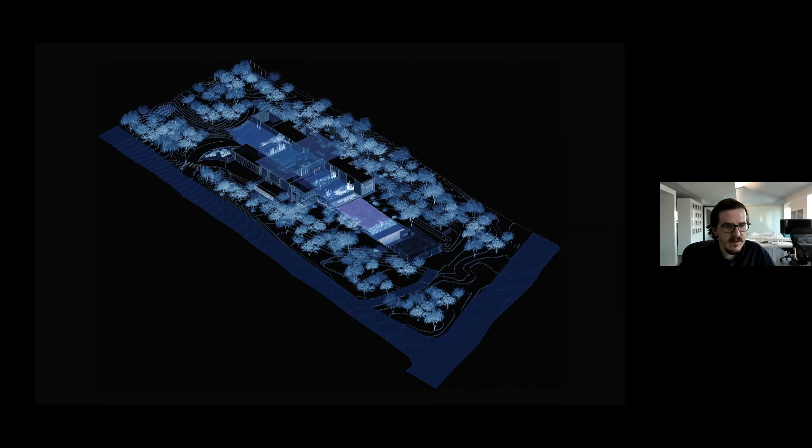So it's not just the Ghost Wash. The name, I guess, comes from this idea that it's a remnant, or the vision of an idealized wash that is in that area, which has now become part of the house.

So the conceptual framework begins from these desert images. The top image shows a nurse tree, which provides shade, adds moisture and cover to animals that graze, and adds extra nitrogen from leaf litter and bird droppings from the branches. These conditions facilitate the growth of cactus below the overall canopy. The desert wash at the bottom captures water, soils, and organic matter from the surrounding landscape. It hosts bigger trees than the surrounding desert can support because it has access to more water. Dry washes occupy less than 5% of the lower Colorado River subdivision of the Sonoran Desert, but host 90% of the bird life—so they're important corridors for animal and plant movement, and for the environment within the Sonoran Desert landscape.

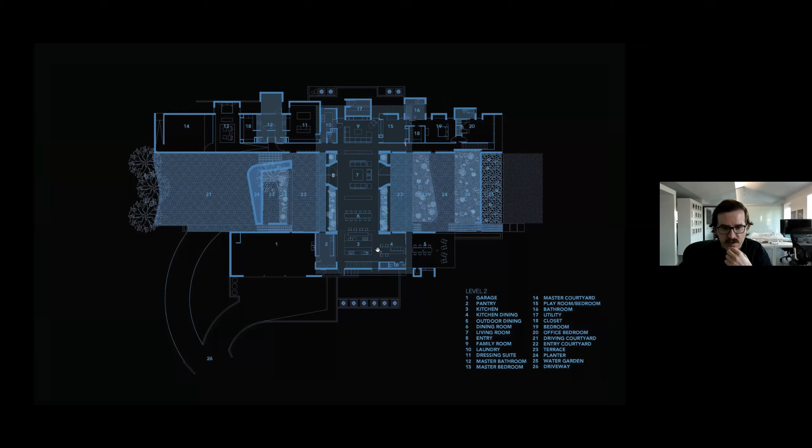Looking at a basic floor plan of the upper level, you can see the programs: the driving courtyard, entry courtyard terrace, entry doors, and the main public spaces of the house. On the west side you have a master suite area, master closet, a living sitting area, bedrooms, an office space, garages, kitchen, and patio. The lower level has more office space, a gym, wine cellar, and mechanical areas underneath.

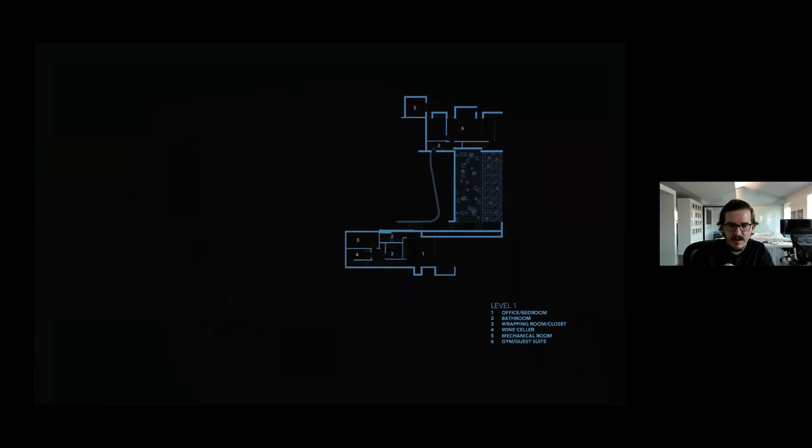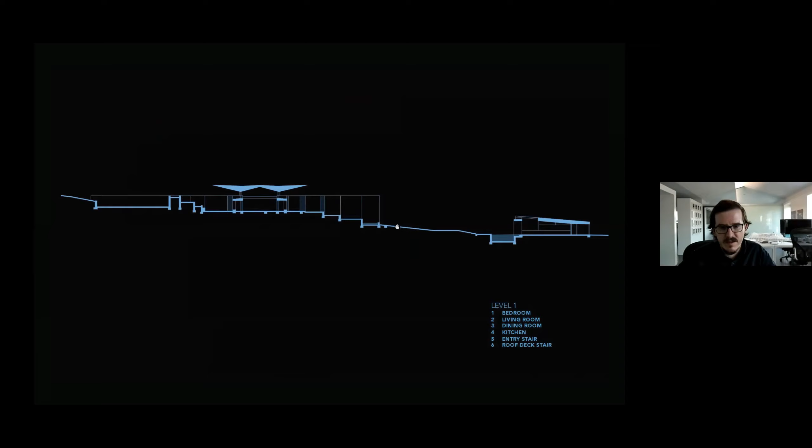Through the section of the building, the parking court is over here, then the entry courtyard with the planters, the public space in the middle underneath the canopy, and how it steps down the landscape to the pool area, with the pool house above.

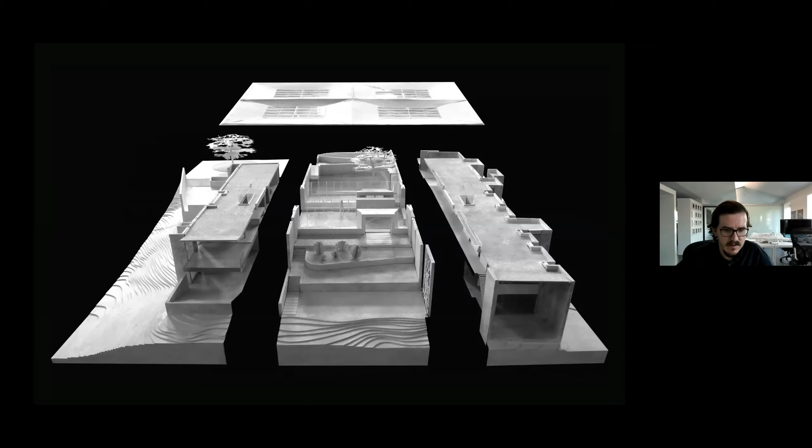This was an early model we made of the project almost 10 years ago, to get a better understanding of the systems involved, and to show the early thinking on the project.

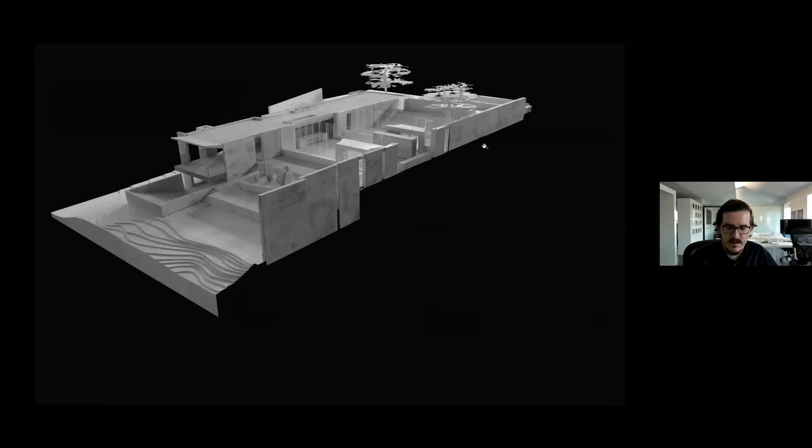Going through the three bars of the project, you can see the patio area, space underneath, kitchen, and the garage area. That middle banded landscape coming through is more figured with curved walls and concrete apertures. The west bar has deep recessed windows, a much more massive part of the building, as a way to shield the rest of the building from the low west sun.

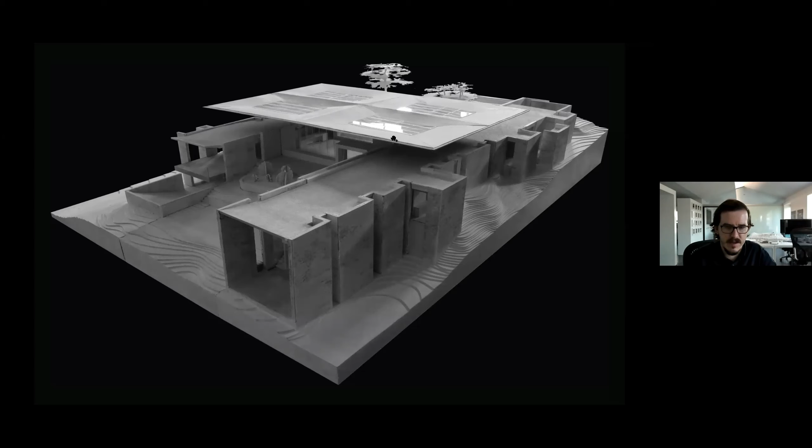Then the canopy comes in over the top. It not only shades the building but has solar arrays on it—the configuration is slightly different than what's shown here. It also comes down into four points that land on four parts of the concrete ribbons that form the entry, as a way to collect rainwater from the building.

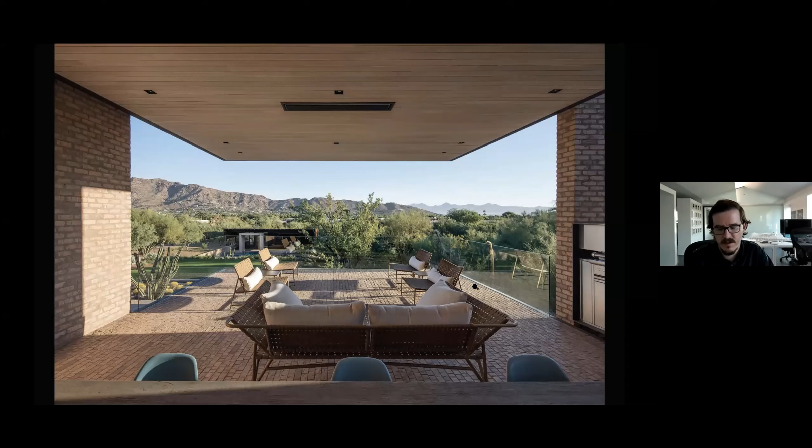If you're looking back up at that patio, you see the landscaping integrated as part of this highly defined wash, architectural wash space in the middle.

There are two separate offices in the house. One is on the west bar, one is up on the upper level, the east bar.

So this house won the AIA National Residential Award in 2018, as one of the top - I think there were 5 or 6 houses that the AIA selected in their residential category.

So now I'm going to talk about two projects that we haven't really talked about too much yet: the 4321 house and the OB1 house. One is located in the Arcadia neighborhood of Phoenix, and the other is in an area of Scottsdale, basically the middle part of Scottsdale.

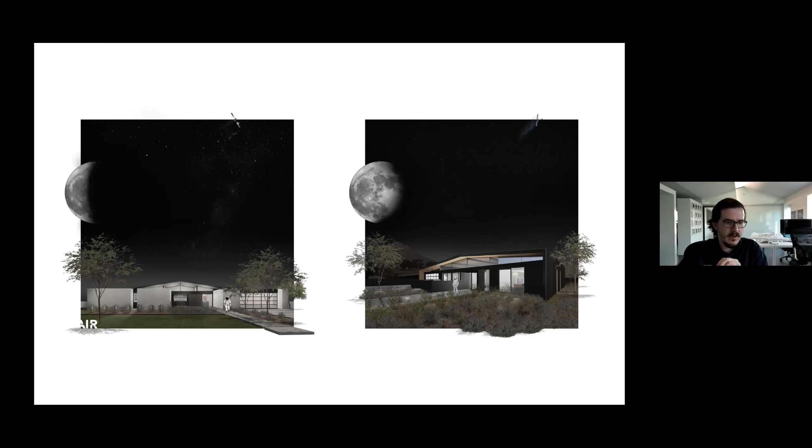So this is the finished 4321 house. Looking from the outside, you can see those white stucco masses.

This is unfortunately a west elevation, so it's some difficult sun exposure in the evenings. I'll show more of the tectonic system that's supporting this, but it's based on what we looked at in some of the case study houses, the Eichler houses, where they had large glulam beams that transferred the loads of the roof across the building.

So with this, we looked at how do we not only create a thin canopy that disperses the weight across the space, but transfers those loads down to larger glulam beams that form a datum across the house, and span across these masses to support the weight of a roof that on the outside seems very thin, but you can see the thickness of the glulams it takes to support that weight. So it's about these larger masses in front that protect the building as much as possible from the western sun, these recessed spaces, and then the large canopy on top that disperses its weight down to those masses.

And the glass acts as a negotiator between those systems and fills in those gaps to create a sealed system that's obviously occupiable, but also as a way to bring light in and to negotiate the geometries that are different between the massing and the canopy. So beginning in the construction of it, you see how the massing of the building, these low rooms are on the side, and then the canopy itself marches up over the top.

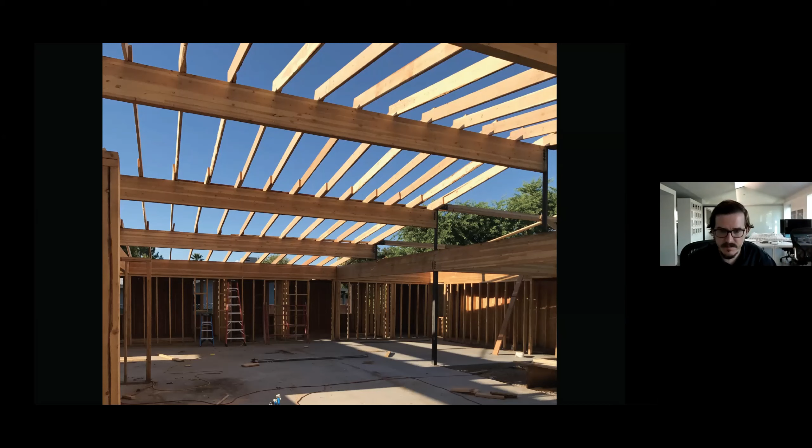And here you see during construction, the sheathing on the massing parts of the building, the steel supports, and how the roof is carrying and floating over the top. And this would end up becoming the front door right here. See in the kitchen behind it.

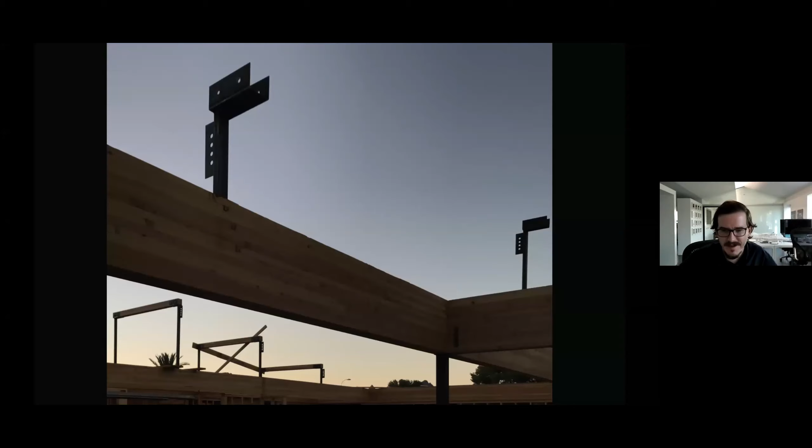Again, another view of those steel supports. You can see they haven't been quite calibrated yet, so they're not tuned to be plumb. But how those things sit on top of these transfer beams in the middle span, and then divert the loads down from the smaller beams up top that they're carrying.

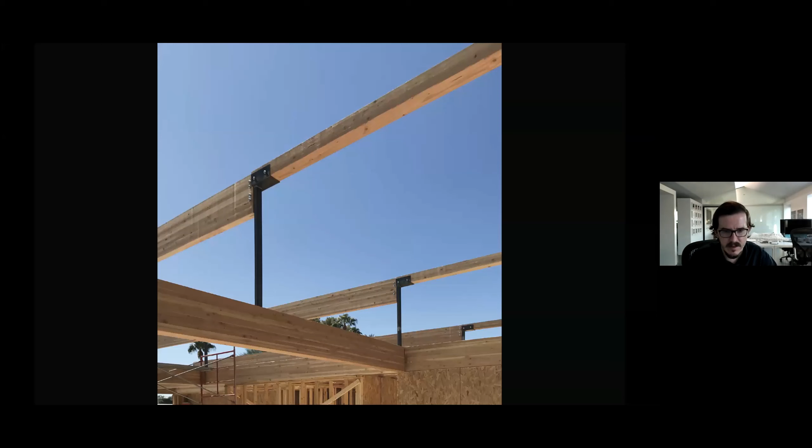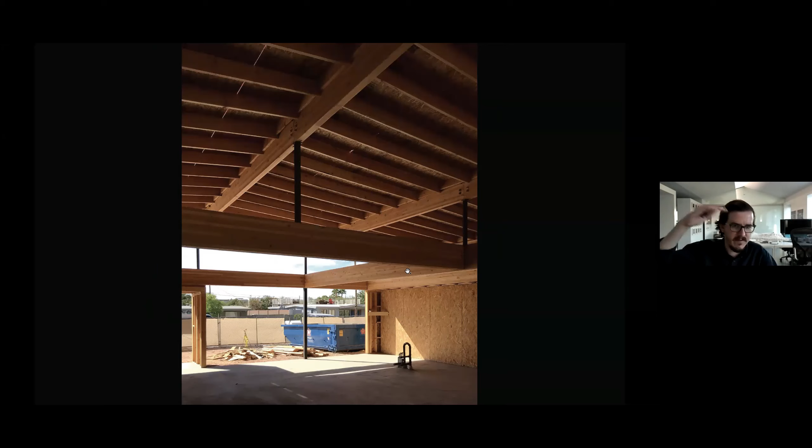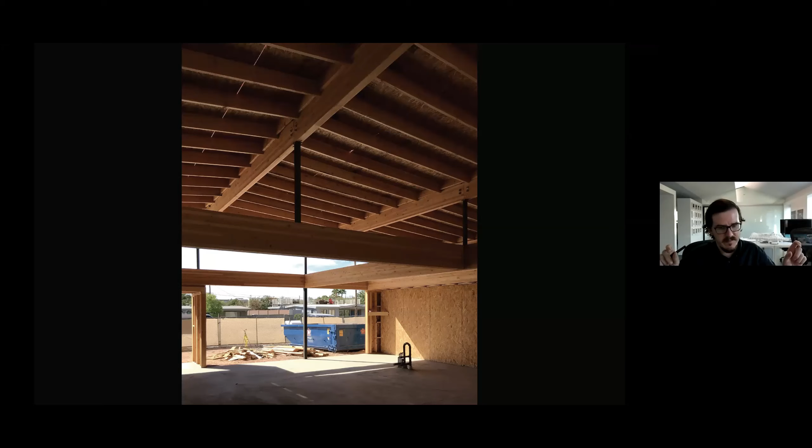The framing comes into the side, steel post, 4-inch by 4-inch steel post supporting the roof, and then going down to transfer beams below. So you get the benefit of the height, but the mass of the structure is dispersed over the whole dimension of the canopy, so you're not trying to beef up something at the very top or at the very bottom - it's spreading the structural loads across the building.

So this is the house with the wood ceiling framed in. You can see up here, there's some reflectivity - it may be hard to tell, but you can see in other photos we had some mechanical areas above this datum height of the glulam beams, so we clad those in mirrors. It reflects the tongue and groove boards over the top and allows that continuity of material to read across the space, so you're not distracted by other masses popping up outside the building.

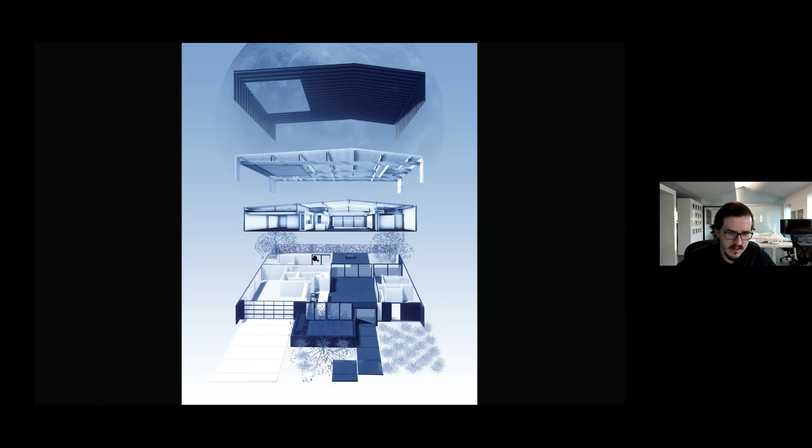So basically with this, you have the front entry here, the living dining area, kitchen, pantry, powder room area over here, a bedroom, a Jack and Jill bathroom behind here, and then another office/potential bedroom right here. Then the master suite is back here with the master bath right here, and then a garage tandem spot that could eventually turn into another bedroom.

So quickly, I'll try to wrap up.

We're still determining the nomenclature for this project, but this is what I'm going to show you: the Cape Town projects, or at least one of the projects we're doing in Cape Town that we tentatively titled Gemini. In the case of this area, it's a single-family neighborhood trying to densify, so our client tasked us with creating duplexes—in that sense we have these twins within the building unit itself. But also we're doing two projects relatively close to one another, same program, same client, same building systems, but radically different in terms of their form. So they're twins in that sense also. That's where the kind of thinking comes through with that.

But to familiarize yourself with the geography of the Cape of Good Hope in Cape Town, you have the main city center right here on the north side of the Cape. Table Mountain, which you'll see pictures of, is right here—it's a very iconic, emblematic image of the city. You have these vast areas of flatland that contain mostly the townships and lower income levels, and then some scattered cities across the Cape as it extends down to the Cape of Good Hope.

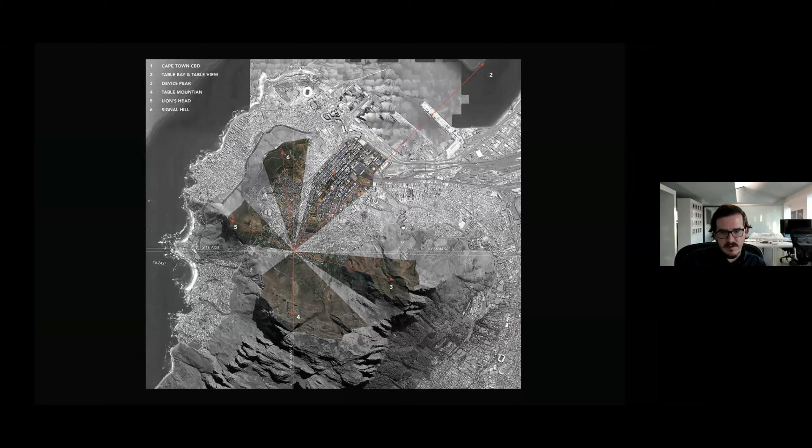But basically, our projects are located right at the base of the natural preserve for Table Mountain. So all this area up here is basically nature preserve—sometimes forest fires or brush fires go through there.

They try to limit the spread of those from the natural areas into the city, but it's a constantly regenerating landscape. It's got unique flora and fauna, and the Cape itself has its own class or category of flora that are only found there and nowhere else in the entire world. Even Table Mountain has endemic plant species that only grow on Table Mountain.

So it's a very unique natural landscape, and we tried to look at some of that as we were designing projects. During most days in Cape Town, it might start out fairly clear, but then over the course of the day, you get an accumulation of clouds that come in over the top of Table Mountain, over Devil's Peak, and they call it, not ironically, the tablecloth that comes over the top. So the way the cloud systems function...

...and are part of this constantly evolving landscape was something we looked at in thinking and design of our precast concrete systems for the project. Looking at the geology, looking at the natural landscapes, and how we could design a system that could integrate views and relationship to the site, the same way the clouds do, but then be structurally enough to span and create open and viable spaces below, while also accommodating things like solar panels on top, or collecting rainwater for rainwater harvesting purposes.

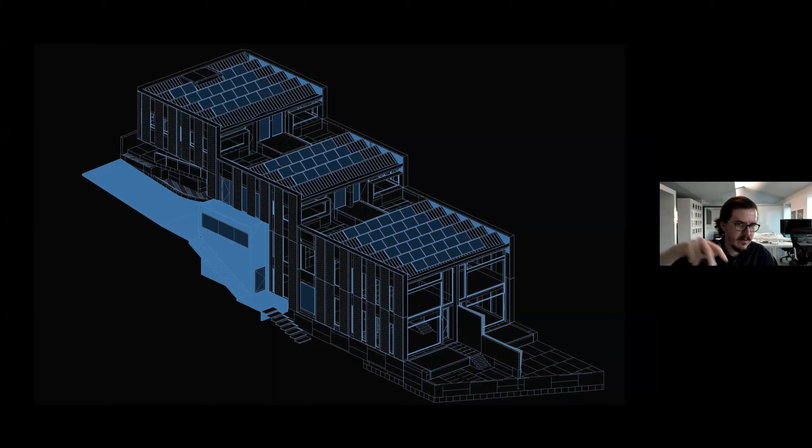But the constraints of building down the side of Table Mountain created this condition where we have 3 separate volumes right here. By zoning, we were required to step down in accordance with the heights dictated by the city. With this, to mention too, these are 2 units, as a duplex. We saw a lot of cases in Cape Town where you'd have 1 unit on top and 1 unit below, but in order to prioritize the views, we wanted to have 2 units side by side with equivalent views, primarily out towards Table Mountain and then towards the city center and Table Bay.

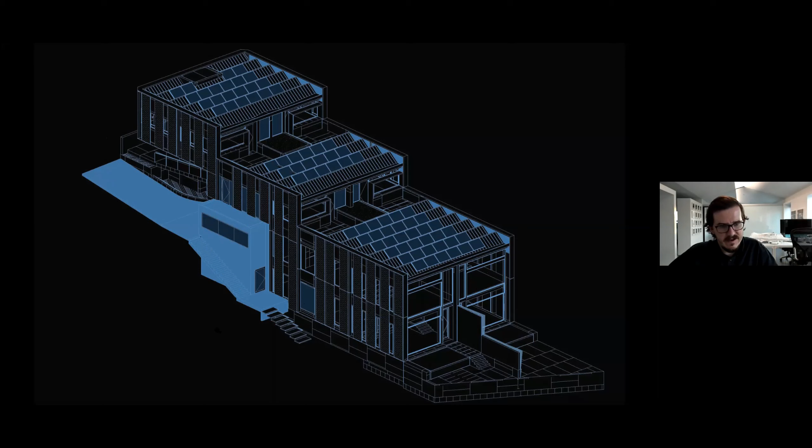So these are 2 units side by side with the same program. A master bedroom area up here, the entry is kind of below this, you'll see in the section. Entry area with a bedroom on this level, garage underneath. The driveway comes down, and then you enter the garage down here, and then kitchen living area on this level, and then a recreation area, bedrooms, and service area down below. So it's a lot of program tightly stacked and condensed in a narrow band, then fit side by side to form 2 units.

So you can see here the way it steps down. We have a cistern down at the bottom of the swimming pool here, but the main entry would be at this level. You walk across up to get above the garage area, and then enter into the building here, then descend down a series of stairs. You can't see it in this section, but behind the garage here, you would descend down a stair to get to the main living area. Or if you're coming in for daily groceries, things like that, you pull into the garage and then just walk right through the kitchen.

But you have the master area up here, bedroom, closet, bathroom. The bathroom has views up towards Table Mountain, and then also a patio up here with views out to the city center. You can see the beams as they march down. Clerestory windows also up here, so you get views from inside through the building up towards Table Mountain.

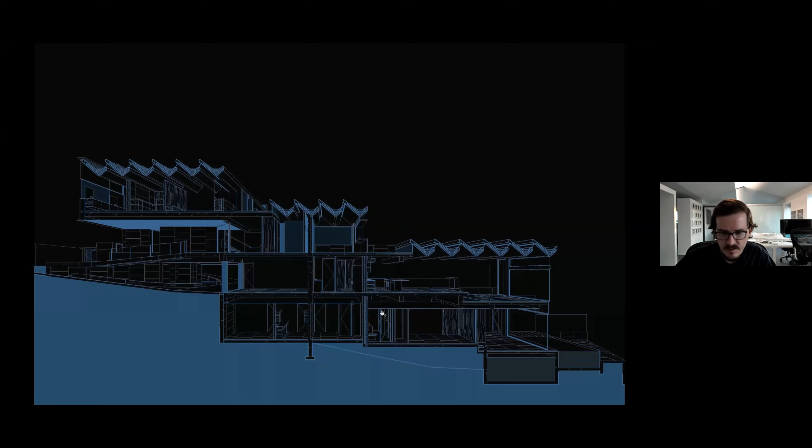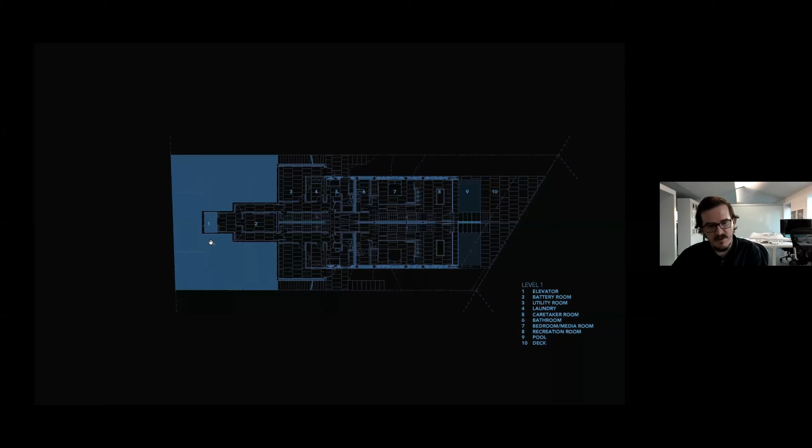So at the bottom area, we've just shown one side of the project. The program is mirrored on both sides, but we have an outdoor patio, swimming pool, recreation area, bedroom, bathroom, servants' or caretaker room, laundry, and then a mechanical area, and an opportunity for an elevator here, which acts as the main structural support for the master bedroom area up above.

Again, you see the driveways coming down into the garages, entry, pantry, kitchen, dining, and then the living area, which has expansive glass that looks out towards the city and Table Bay.

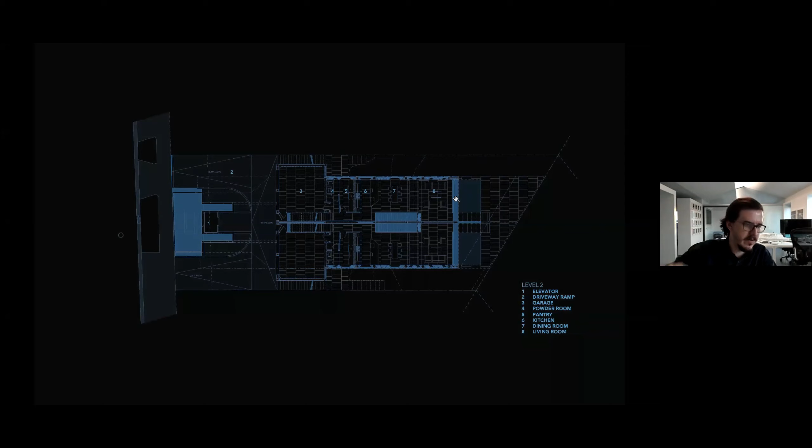This is all with north to the right, by the way. So this is the entry level up above, up a ramp to the main door of the house.

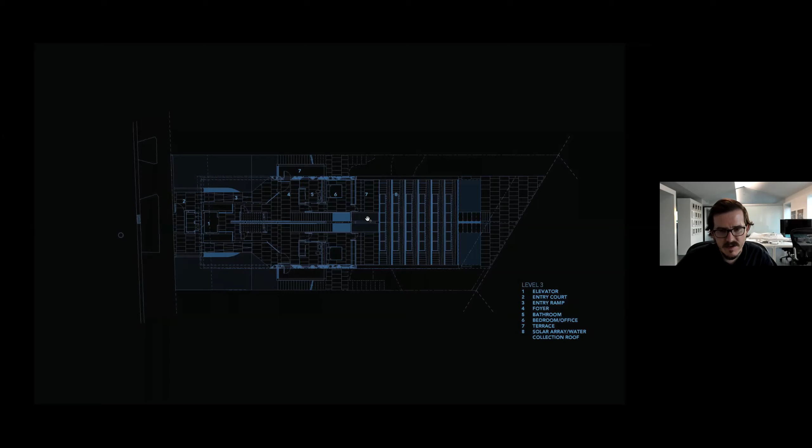There's a bedroom with bathroom suite, patio, and then stairs that would take you down to the main kitchen areas of the house below. And then this stair would go up to the master bedroom area above, to the master suite with the closet, bathroom, and patio.

And then you can see the solar panels on top, and water collection goes out to the sides of the building into the precast walls, and then down through rain leaders into the cistern below.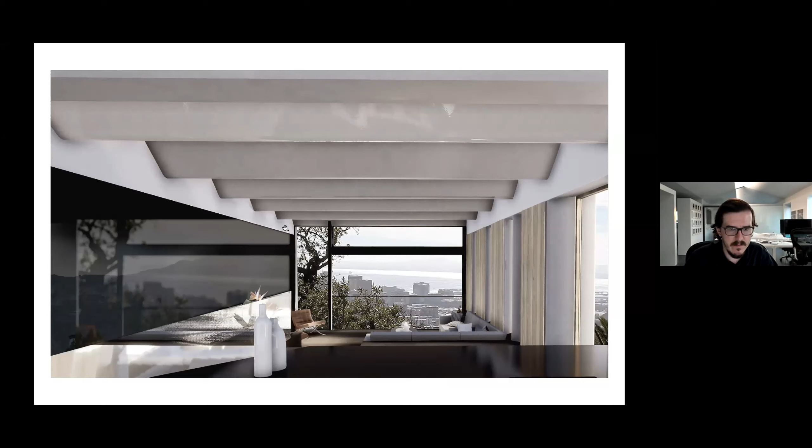These precast concrete beams spanning across, providing not just a formal resemblance to the clouds, but also allowing for clerestory views back up through them.

So they collect water, provide solar panels, but hide the solar panels and allow you to get light and views throughout the space.

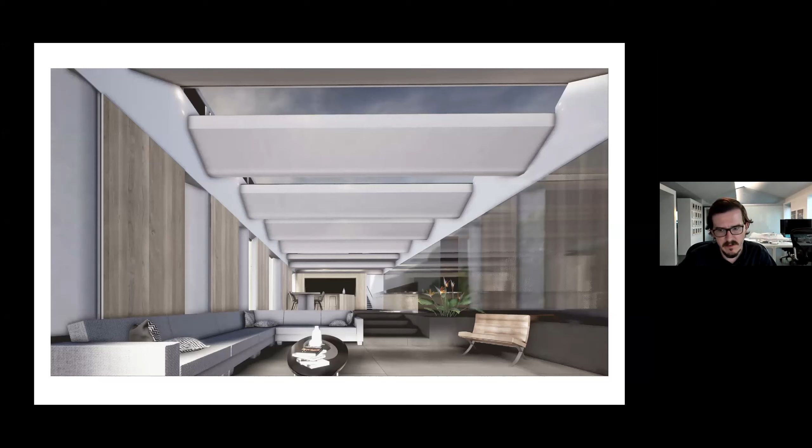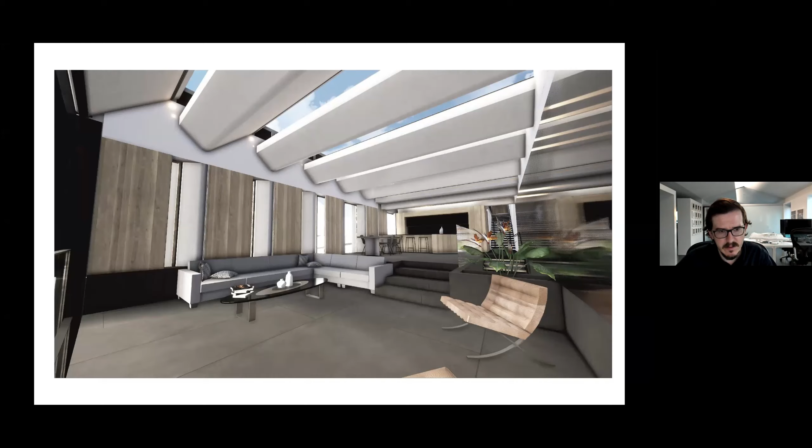Another view. You see the curvature of these columns over here, exactly the same as these roof beams. They're the same form that's just been turned down through the building to create those vertical supports.

And then this is the same product, basically the same program and similar construction system.

These beams are the same as the ones here, but we have unique conditions on the side. So it's the same program, but it's a different lot, different configuration, different opportunities for views.

So it's a radically different formal strategy, but it's using the same tectonics and has the same program.

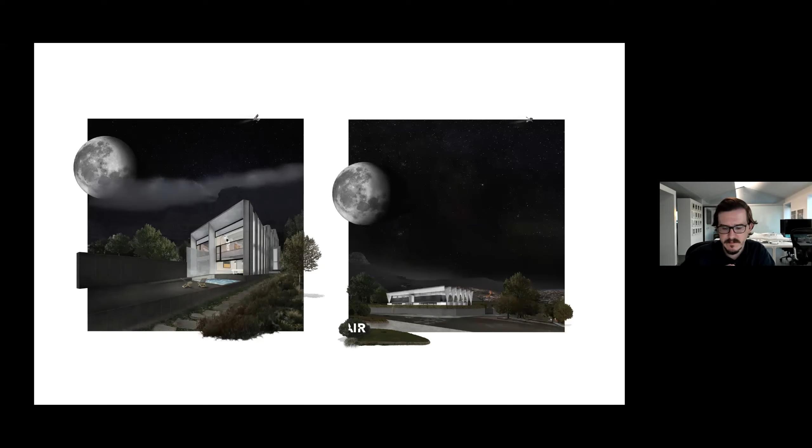So I'm going to just quickly end by talking about some of the work that I've done in the studios that I've taught, just as a way of not only talking about practice, but I think the benefit of being part of the university is constantly being able to engage and discuss ideas of architecture that you might not get to talk about in the office as much. Both myself and Darren teach at the university, so having that connection as a way of constantly filtering through ideas and grappling with design problems outside the scope of normal practice has been hugely beneficial.

So two primary areas that I'm focused on in terms of teaching are the idea of scale and composition.

In this case, this was an early study from when I was in a housing studio co-taught by Victor Irizarry. He developed an exercise where students would composite collages to talk about domesticity and the idea of living, in a way that allowed them to free up preconceptions or get away from the standard and tired conventions of housing. Some students looked at it like maybe there's a series of rooms, a series of windows, but other students were obviously a lot more playful with how they viewed it.

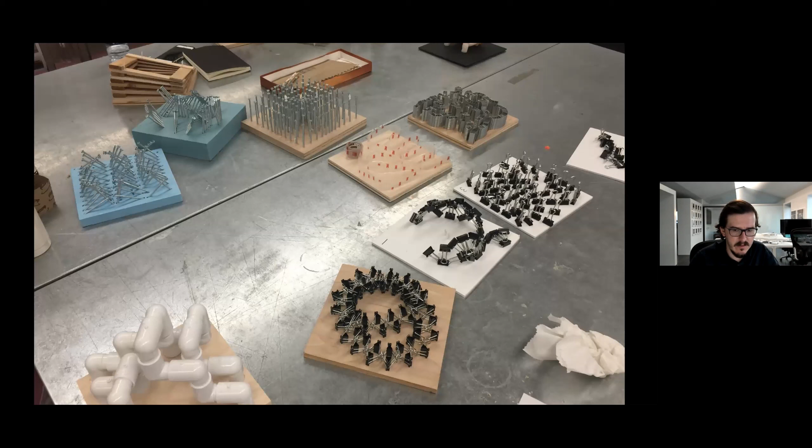This exercise was inspired by an exhibit Sou Fujimoto did at the Chicago Biennial, where he took found objects and tectonically arranged them and put scale figures in to create spaces—he had an example using staples as part of it. I had my students use screws, 3M tape, binder clips, pipes, and wood shims, which allowed them to explore geometries they maybe weren't familiar with or wouldn't conventionally derive from Revit or SketchUp, as a way of understanding the tectonics, or in some cases the stereotomics, of defining these spaces.

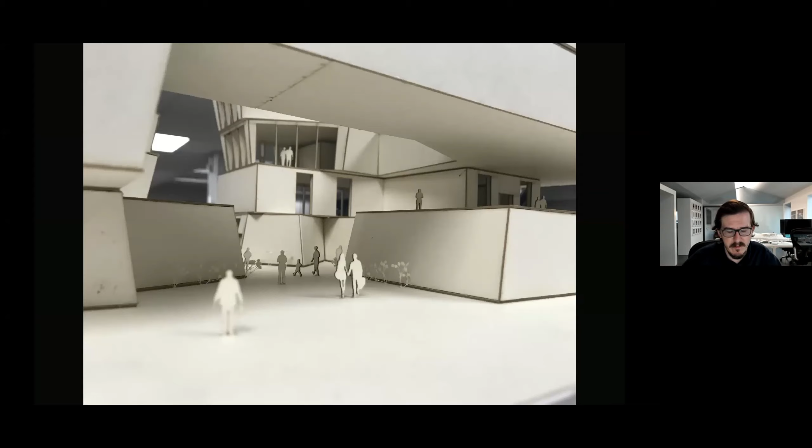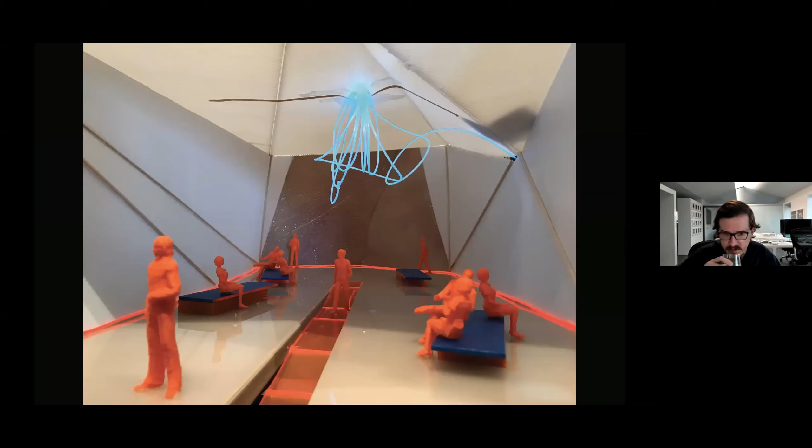Then looking at how those things translated into final projects with an understanding of scale and proportion—in this case a housing project, and this one an interfaith spiritual center that the student designed for the ASU campus, representing a view towards one of the surrounding desert buttes. Really getting students to think about scale and the human body's relationship to the space, and trying to get them into the project in a way that, even though there are great things about modern computer programs like Revit, SketchUp, or ArchiCAD which we use in the office, there's still a disconnect in how those things are implemented. I think until they actually build buildings in the field, this is the next closest approximation for how they can really understand and get a feel for the spaces they create.

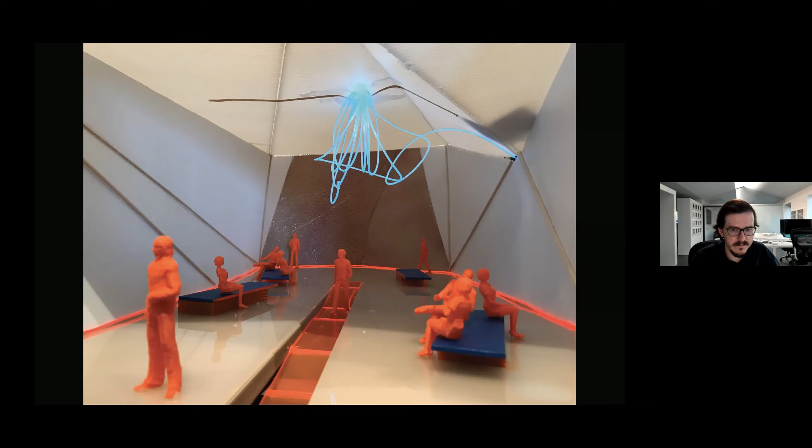And that's it. Thank you.